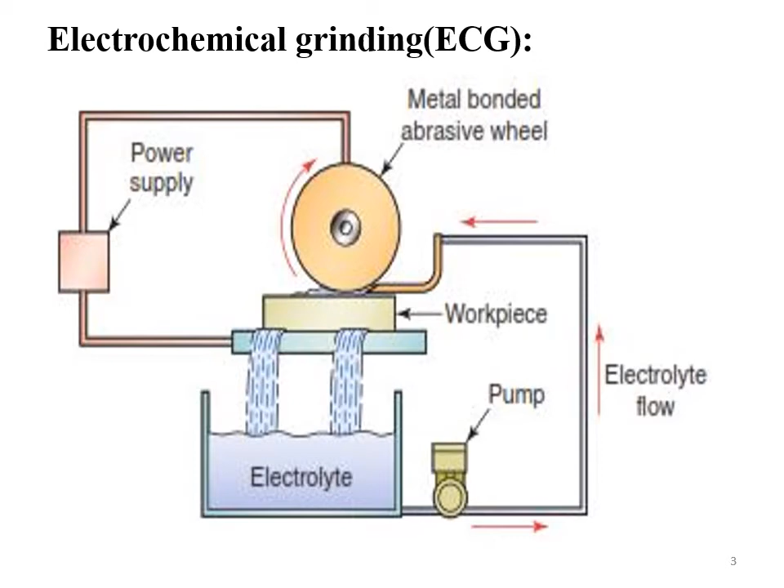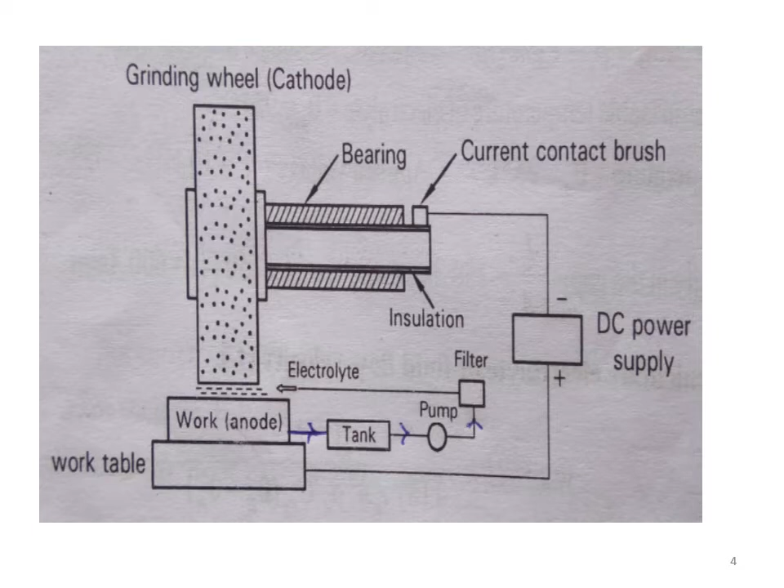During the process, the electro grinding wheel will rotate. Along with the grinding operation, the electrolyte will also function for easier removal of material. The workpiece is connected as the electrode, that is, the anode, whereas the grinding wheel, that is, the tool, is connected as the cathode. In between the gap, the electrolyte is pumped onto the machining zone.

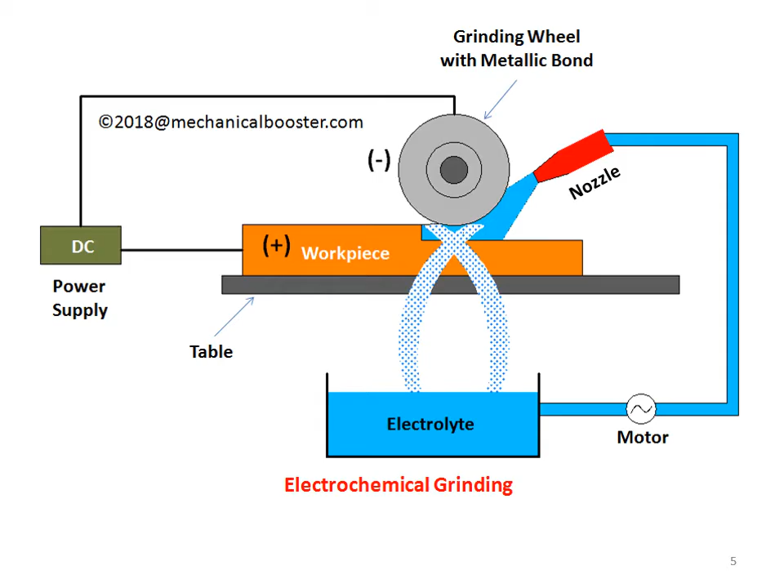So electrochemical grinding is a process that removes electrically conductive material by grinding with a negatively charged abrasive grinding wheel, an electrolytic fluid, and a positively charged workpiece, that is, anode as the workpiece and cathode as the grinding wheel.

Electrochemical grinding and electrochemical machining are similar, but a wheel is used instead of a tool shaped like the contour of the workpiece. In general, in electrochemical machining, the tool shape is made like a mirror image of the desired shape, whereas in electrochemical grinding, which is a special application with some modification, the tool is an abrasive wheel instead of being shaped as a mirror image of the desired shape on the workpiece.

The change in tool shape and type is different here. The wheels and workpiece are electrically conductive. Wheels used for electrochemical grinding typically remove 90% of material by electrolysis and only 10% by abrasive grinding, whereas in conventional grinding, the wheel removes all material from the workpiece surface by abrasion.

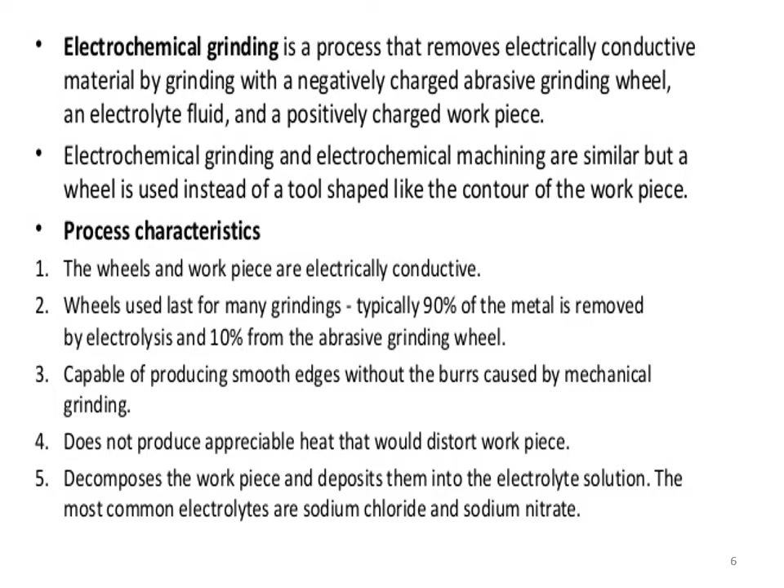The most common electrolytes, as discussed in electrochemical machining, are also used here. Similar to ECM, sodium nitrate and sodium chloride salt solutions can be used as electrolytes in ECG.

Electrochemical grinding combines electrochemical machining with conventional grinding operations. The added advantage here is that the major material removal gives a machined surface that is highly smooth compared to conventional grinding. Further, it is a burr-free operation, and the residual stresses are completely reduced.

The equipment used is similar to conventional grinding, except that the wheel is a rotating cathode with abrasive particles. The wheel is metal bonded with diamond or aluminum oxide abrasives.

Even low cost abrasives are more than enough here, whereas in conventional grinding, grinding very hard materials requires costly abrasive tools. The abrasive particles need not be very hard relative to the hardness of the workpiece. Further, abrasives serve as an insulator between the wheel and the workpiece.

A flow of electrolyte, such as sodium nitrate, is provided for the electrochemical machining process. It is suitable for grinding very hard materials where wheel wear can be high in traditional grinding.

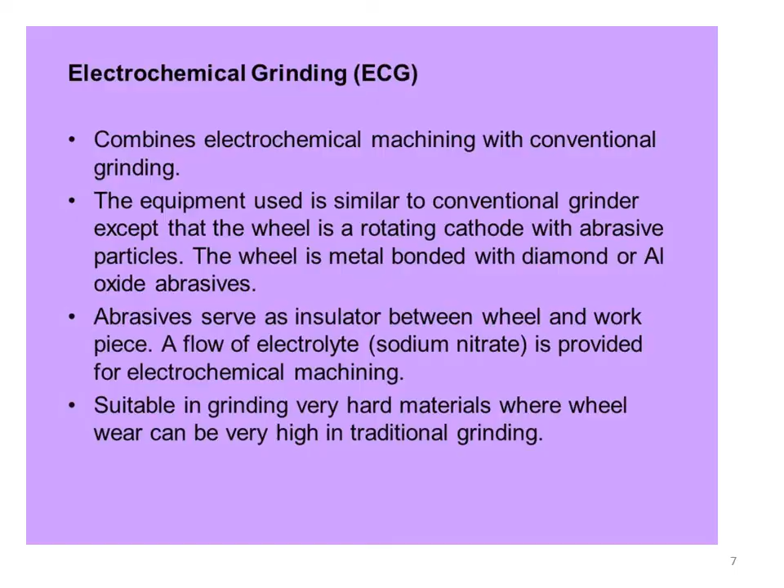Types of grinding wheels: grinding wheels are made of abrasive materials and bonding agents. Several types of current carrying abrasive wheels are used for electrochemical grinding. There are two types: one is diamond wheels, generally used as an abrasive for grinding carbide tools or materials and steels whose hardness is greater than HRC 65.

Machining, especially grinding, of materials with hardness greater than 65 HRC is a very great challenge with conventional machining processes. Whereas with electrochemical grinding, it can be easily machined because 90% of material is basically removed with the help of the electrolysis operation.

Non-diamond face wheels: the common type of abrasive used is aluminum oxide, with brass or other alloys as the bonding agents. This type of wheel is generally used for grinding steels and alloy steels.

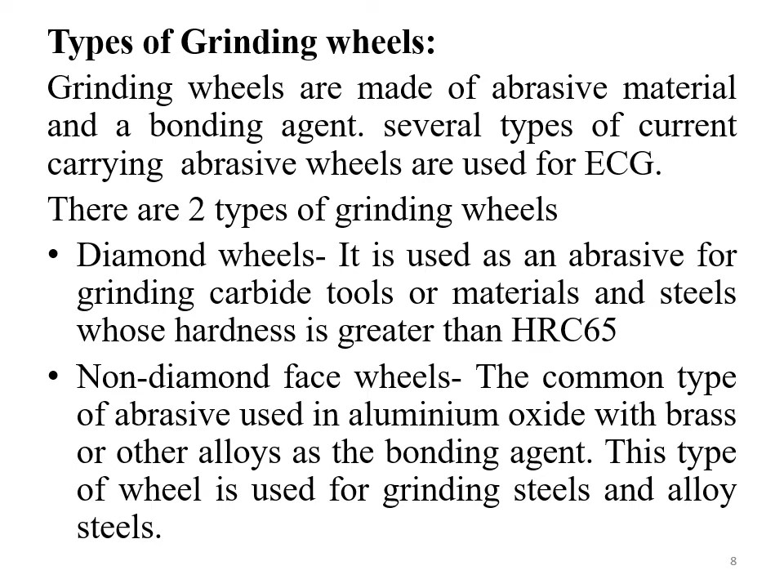Advantages: it can grind very thin material of 1.02 mm, which normally warps by the heat and pressure of conventional grinding. Further, the major advantage of electrochemical grinding is that it is a burr-free process, which is a limitation of conventional grinding that can be overcome with ECG.

No work hardening occurs. In conventional grinding, residual stresses remain because the stress applied is beyond the shear strength of the material, inducing work hardening in the machined surface. In ECG, this kind of mechanical character distortion is completely eliminated, making it a stress-free process.

Better surface finish can be obtained with no cracking. Because of residual stresses, cracking on the machined surface is widely observed in conventional grinding, whereas ECG ground surfaces are not having any kind of cracks; they are completely absent. There is also less frequent wheel dressing required.

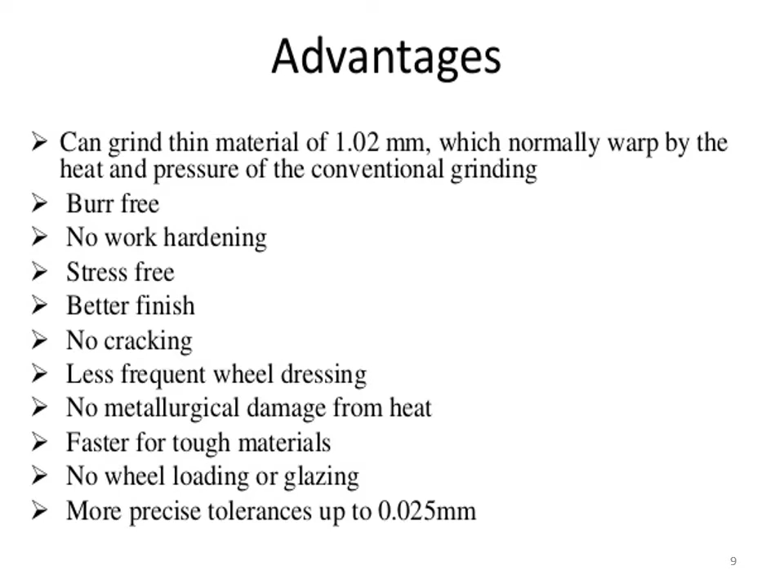More precise tolerances up to 0.025 mm can be achieved with the help of electrochemical grinding operation.

Limitations: both the workpiece surface and the grinding wheel must be conductive. It is only applicable to surface grinding operation. The electrolyte fluid can cause corrosion at the workpiece and grinding wheel surfaces. Especially here, the major limitation of any kind of electrochemical machining operation is that the workpiece and grinding wheel, or the tool and the workpiece, both need to be electrically conductive.

Then only they can be employed in electrochemical machining or electrochemical grinding operations. Further, this kind of process can especially be applied only for surface grinding operation. Internal grinding or other types of grinding operations are very difficult. Further, if even small stains of electrolytic fluid remain on the surface of the workpiece, it will cause corrosion, especially on the machine surfaces and grinding wheels also, which is detrimental and not desired at all.

This ECG process is more complicated compared to traditional machining methods, and it has a higher production cost. Compared to conventional machining, ECG has a higher production cost because the initial setup cost is higher, and the electrolyte cost, maintenance cost, everything goes on to be on a higher side, which finally impacts the total production cost. That's why the production cost will be higher.

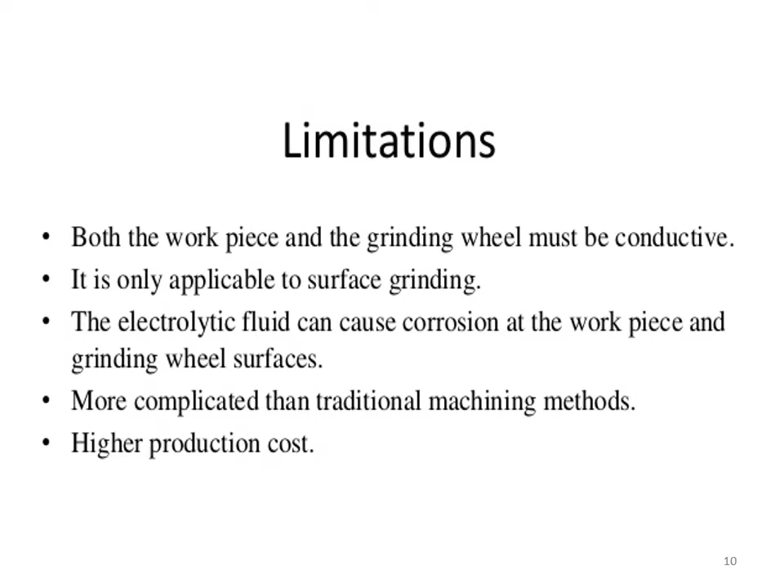Next is about the electrochemical honing process. Honing is again a secondary finishing operation after the primary machining is done. This honing is also an abrasive kind of process where the machining is done to give the final surface finish and remove small burrs, carrying out secondary operations.

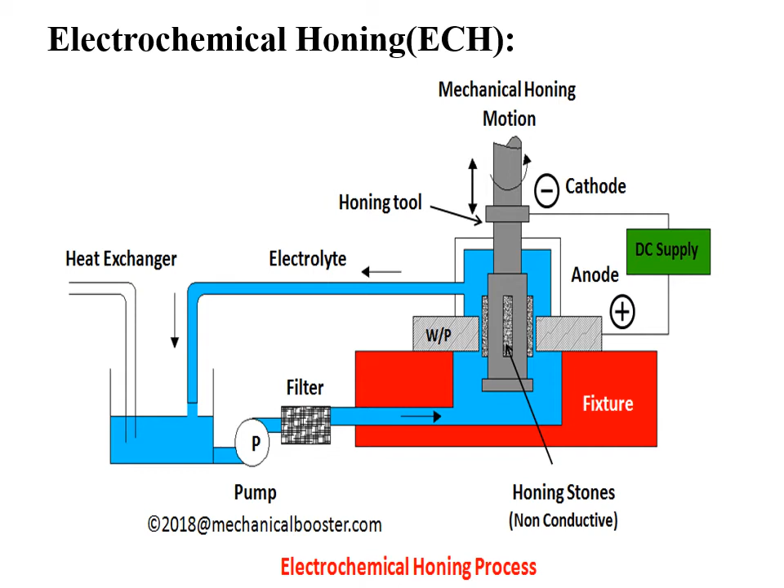Here again the process is the same, where the workpiece is connected as an anode and the tool is connected as a cathode. Here we can see the workpiece connected as an anode and the tool connected as a cathode, and the electrolyte is pumped onto the machining zone, and then after machining the electrolyte is taken back to the reservoir and filtered. Again during pumping also, it has to be filtered, and with the help of a pressure regulator the electrolyte is sent to the container.

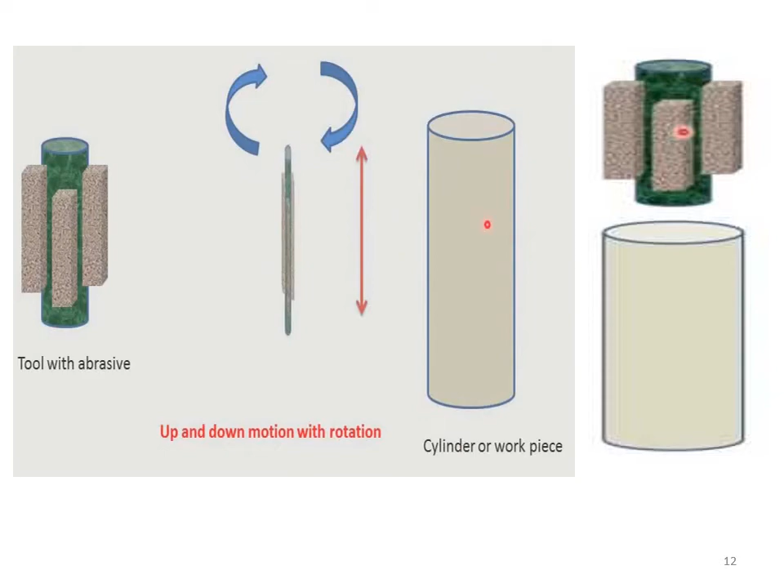Here we can see the tool, which is again a center that is a conductive core over which the honing abrasive blocks are attached, with the core being conductive, which can reciprocate and also rotate. Both motions are completely required, especially for the honing operations.

Due to the rotating and reciprocating motion, the process reduces errors in roundness through the rotary motion. Tapers and waviness errors can also be reduced with the help of ECH.

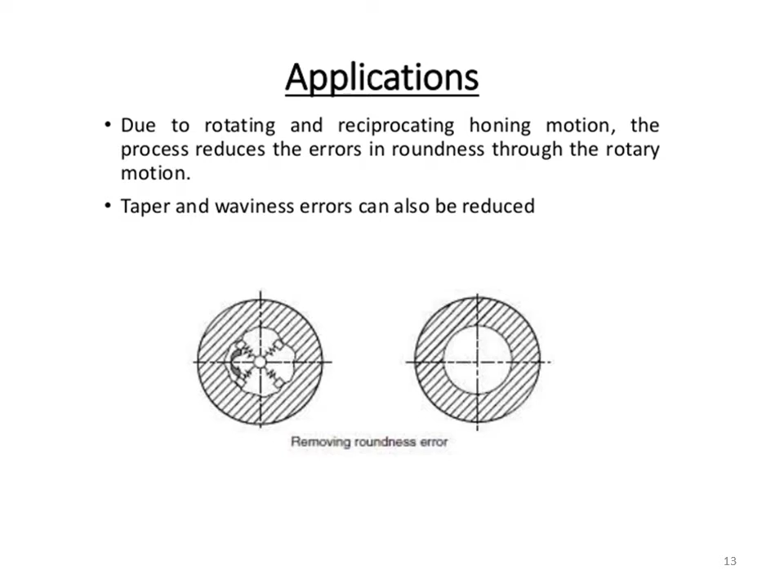So it is a process which combines the high removal characteristics of electrochemical dissolution, that is the electrochemical machining principle, with the mechanical abrasion of conventional honing. So it has much higher rates compared to either honing or internal cylindrical grinding operation alone.

The cathodic tool is similar to a conventional honing tool, with several rows of small holes so that the electrolyte could enter directly into the inter-electrode gap, that is between the tool and the workpiece.

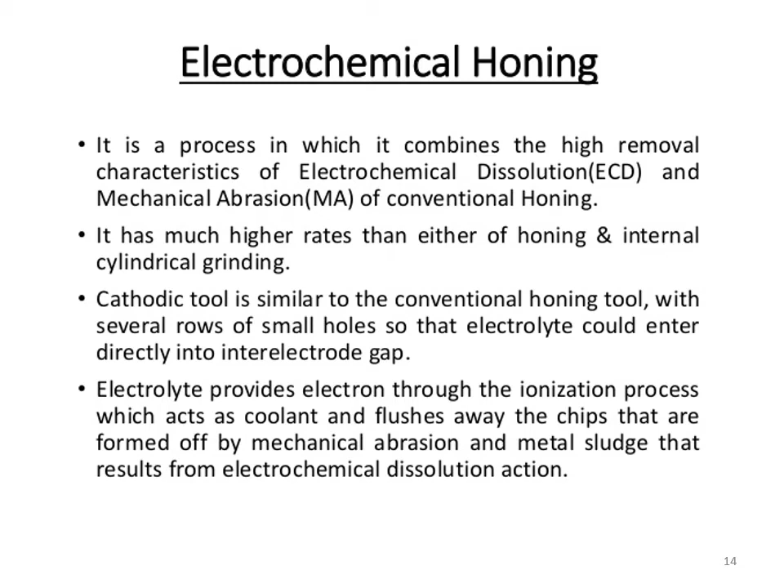The electrolyte provides the electron through the ionization process, so it acts as a coolant and flushes away the chips formed by mechanical abrasion, as well as the metal sludge, which is the machining debris resulting from electrochemical dissolution, that is also being flushed away.

In the electrochemical honing process, the tool is inserted in the worked hole or cylinder, which we have seen in the last slide. Mechanical abrasion takes place first by the stones or hones, which are abrasive blocks. Oxides formed due to the previous process will be removed by it, and clean surfaces will be achieved.

Now the clean surface will be in contact with the electrolyte, and the electrochemical dissolution will remove the desired material. The same procedure is continued till the required depth of cut is achieved, and uniform internal grinding or honing operation is accomplished.

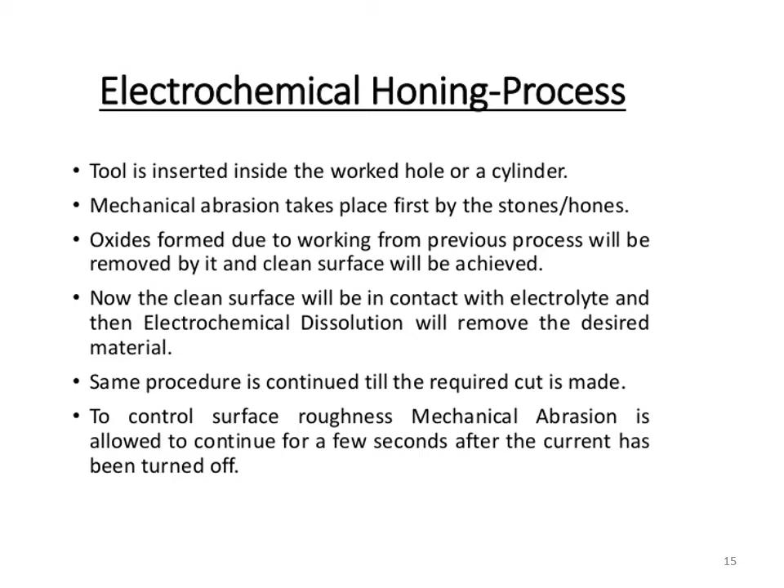Further, to control the surface roughness, mechanical abrasion is allowed to continue for a few seconds after the current has been turned off.

Majorly, the advantages of electrochemical honing are: the ability to grind any electrically conductive material regardless of hardness, burr-free action, reduction in noise and distortion, and high production rates are possible.

Limitations of electrochemical honing include, first, high equipment cost. Generally, in conventional honing process, there is only abrasive action, so there's no need for electric supply, especially high power supply, so the equipment cost will be lesser. Further, electrolyte is also not required, which reduces the cost further.

So overall, the initial investment cost compared to conventional honing is higher for electrochemical honing. The regular maintenance due to the continuous recycling of electrolyte also makes it a high maintenance cost process. Further, the workpiece must be electrically conductive.

As with other electrochemical machining operations, in electrochemical honing too, both workpiece and tool must be electrically conductive. Post-cleaning of work and equipment parts is necessary, or else corrosion of the workpiece and equipment is going to occur.

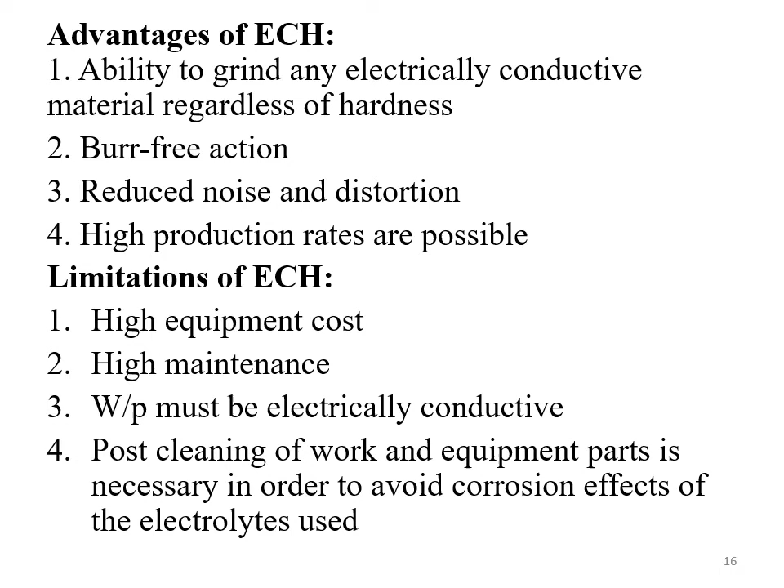So the third important special case of electrochemical machining is electrochemical deburring. Deburring is a process of removing the burrs from the machined surface, which is not desired. If the burrs remain on the machined surface, it will cause the components to undergo premature failure during service.

So electrochemical deburring is done even on conventionally machined surfaces with the help of different types of deburring operations. Electrochemical deburring is one such operation, a non-traditional secondary machining process used to remove metallic burrs resulting from primary machining operations and also from forming operations.

Here also, the workpiece is connected as an anode and the tool is connected as a cathode. Electrolyte is made to flow between the gap of the tool and the workpiece, that is the inter-electrode gap.

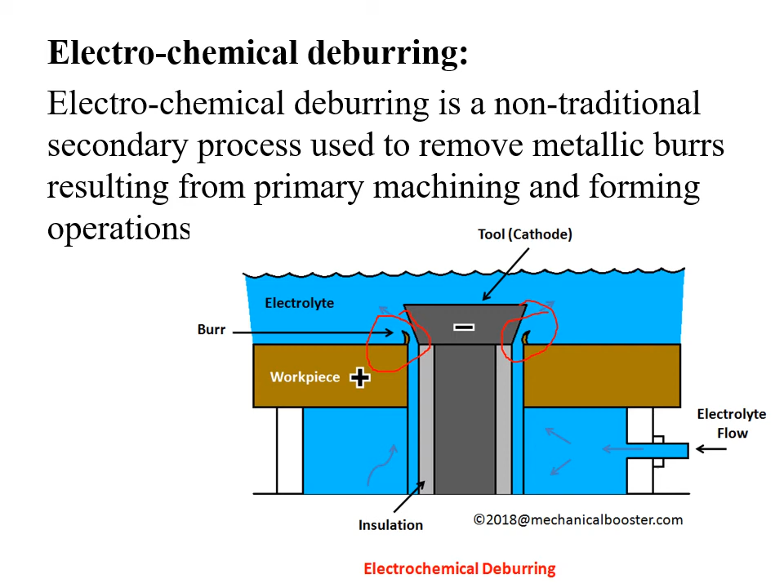During machining, the tool will reciprocate, and the inclined shape of the tool is made in such a way that the burrs are completely or cleanly removed with the help of electrolysis. The material burrs are removed in a very small size manner, because of which the burrs can be clearly removed without distorting the machine surface area.

That is highly important. Simply removing the burrs should not be the primary criteria. At the same time, it should not distort the machine surface. That is also highly important, which can be clearly and easily achieved with the help of electrochemical deburring operation, because it is going to remove the material in very small micron size or nano size chips.

The major advantages are like precise deburring at defined points can be achieved easily. It is relatively faster compared to conventional deburring, because during conventional deburring proper care has to be taken such that the burring happens over the metal projections on the machine surface, whereas here it removes material over a very small distance or length of the workpiece.

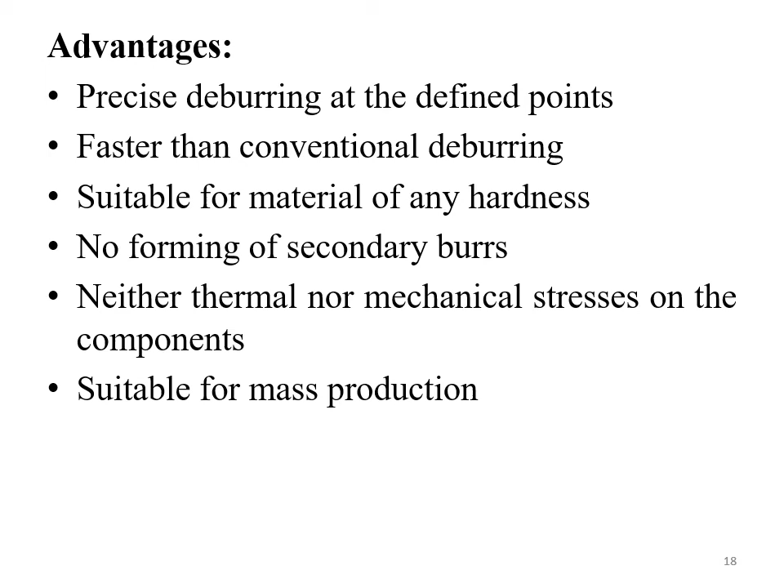It is mainly suitable for mass production, because high initial cost and high maintenance costs are involved here. So rather than customized, specific machining operations, it is mainly suitable for mass production, so that the production cost can be distributed over the components, and the overall production cost may get reduced.

Limitations: it is limited to conductive workpiece materials only. Burrs should be of consistent shape and size, or else larger craters are going to be formed on the machine surface. It is mainly not suitable for small production runs due to the high costs involved, whether initial investment or maintenance. Further, equipment costs are high.

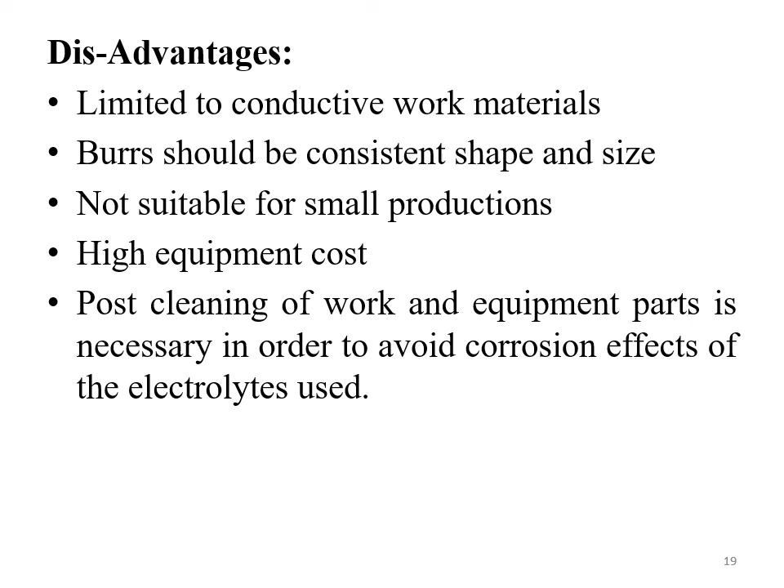Post cleaning of the workpiece and equipment parts is necessary in order to avoid corrosion effects of the electrolytes which are being used here. So this is about the electrochemical deburring operation.

So in this video I have discussed electrochemical grinding, electrochemical honing, and also electrochemical deburring process. These are the three special applications of electrochemical machining operation.

Electrochemical machining is, in general, a machining operation where, as a basic principle, the tool is connected as a cathode and the workpiece is connected as an anode. The shape of the tool is made in such a way that it causes the workpiece to take the opposite shape, that is, a mirror image of the tool shape.

The electrolyte gives free electrons in the machining area or machining zone, so that the material from the workpiece reacts with the electrolyte ions and causes metal oxides which precipitate in the electrolyte. Further, it is flushed away by the electrolyte from the machining zone, and it gives fresh ions for further removal of material.

The major advantage is that a very good surface finish can be obtained, and a larger material removal rate can be achieved. These are the major advantages.

The limitations are that the workpiece and the tool both need to be conductive, and high current supply is required; high maintenance cost and high initial equipment costs are involved here. So it becomes the whole process costlier compared to other processes. This is the summary of electrochemical machining.